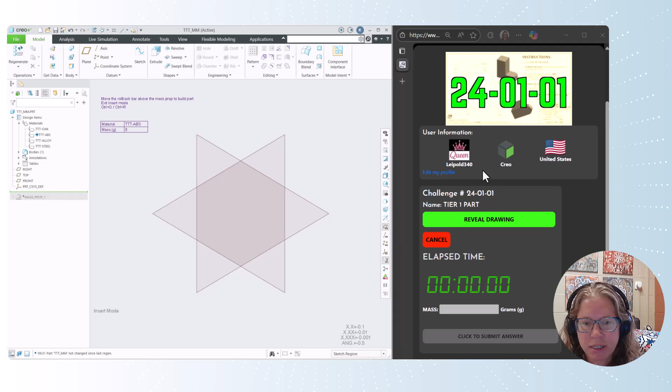So they're all loaded up into this template, but that's how we're going to work through this. I'm a big fan of Too Tall Toby's, and you should definitely go check it out if you haven't. All right, so we're going to hit reveal. We're going to make this part, and we'll see how quickly we can do it.

All right, so we're going to start with a sketch on the top plane. And notice I didn't click that button there, I just hit the middle mouse button. Creo loves middle mouse. I did not mean to get that equal sign, so we'll delete that.

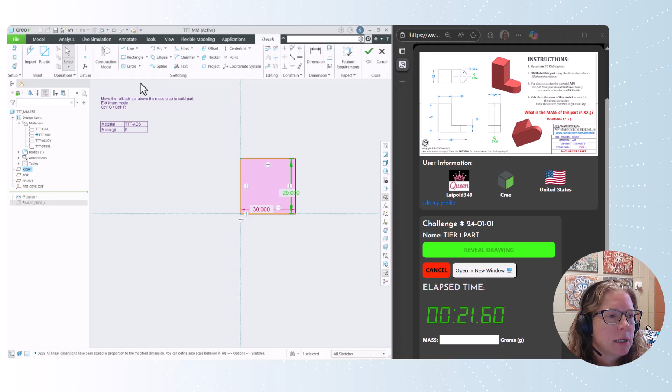And this is the tall part that I'm sketching now. And then I'm going to have another rectangle that kind of gets me over to my circle, which is in the center. And I don't love this dimension here, so I'm going to place the dimension for the overall length.

And in Creo, the trick with placing dimensions is you got to use your middle mouse button. There we go. Make that 65.

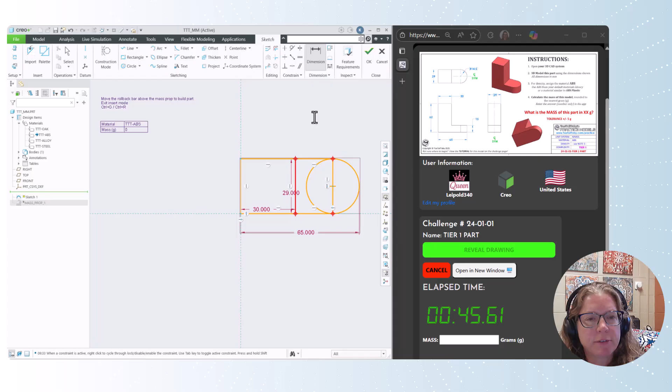Okay, so if I were not going to use sketch regions, then I would need to... let's extrude this, 32. I would have needed to trim out some of that geometry in there.

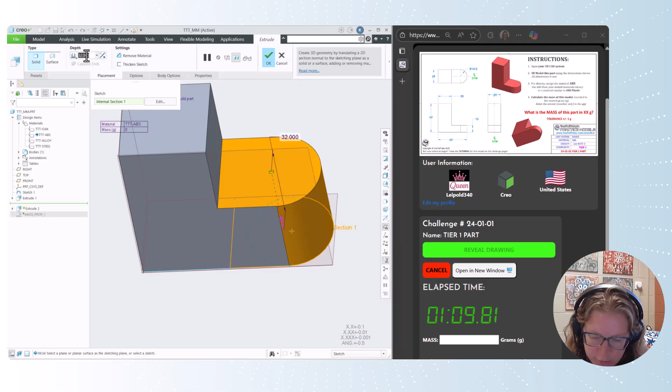And another trick with Creo is if you're selecting multiple, you got to hold down Control. So a couple of Creo tricks right there off the bat. Hit Control D, everything looks good.

We're going to roll that down, regenerate the model, refresh the screen, and we get a mass of 69 grams. So 69 grams is the correct answer, and we can go ahead and submit that.

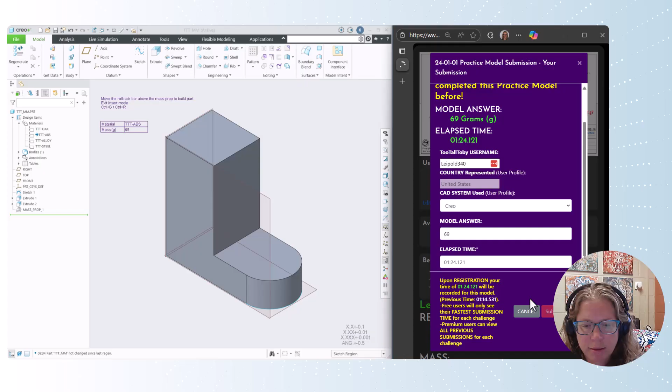If I didn't like it, I could have hit cancel. So there we go, that is the very first part from Too Tall Toby. So we'll add a few more and keep filling in this playlist.